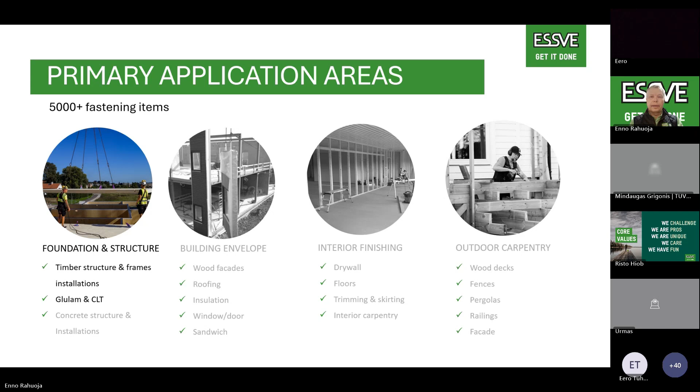Today we're talking about working life, and working life of building materials is the focus. The fastener part of working life will come in June, before summer holidays. But I will raise a question here: if we talk about working life, we know that there is short, medium, normal, and long, where short is 10 and long is 100 years.

I will raise a poll question now where I ask what is the expected working life of fasteners. Feel free to answer, and then you will see how it comes out. We will look at that more closely in June. Then I will take the slide, whether you have already answered or not.

And the feedback is that actually it's 25 years. And the question is, how do we come to that 25 years? If we look at the table of categories of design service life of buildings, that's the picture architects often look at. From an architectural point of view, buildings are normally either medium life, 25 plus years, or long life, which is residential buildings, 50 plus years.

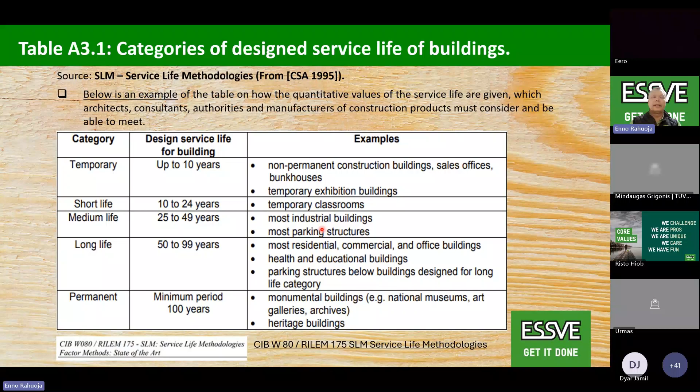But how do we get the facade application to 25 years, for example? That is another supporting picture, coming from the expected service life of works and construction products. So this is the product part, and there is also table 3.3 if you want to go in, with the link below, on design life of construction components.

Why I bring that up as an important discussion point is that normally engineers following this table look at 50 years, and we know that 50 years is the lifetime of the works. I recommend using "normal" in project descriptions. If we write 50, then all applications are automatically 50 years. But if we write normal, then for construction, less easily repairable or replaceable areas are 25 years, and repairable or easily replaceable areas are only 10 years.

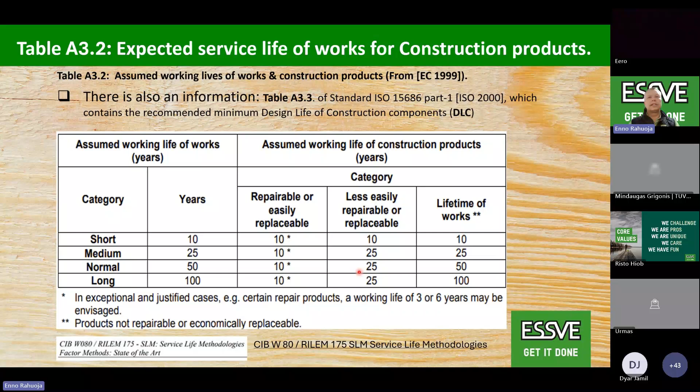And as facades belong to that area, then the working life of a facade will be 25 years, for example. And when we look into the fastener part, also our full system EAD document side in June, then we will see that it will confirm it. To go forward from the fastening point of view, when we apply CE marking for our products, fasteners, then normally we follow the EAD document, we get the ETA, and or we follow the harmonized EN standard. Then it is the same as for the products.

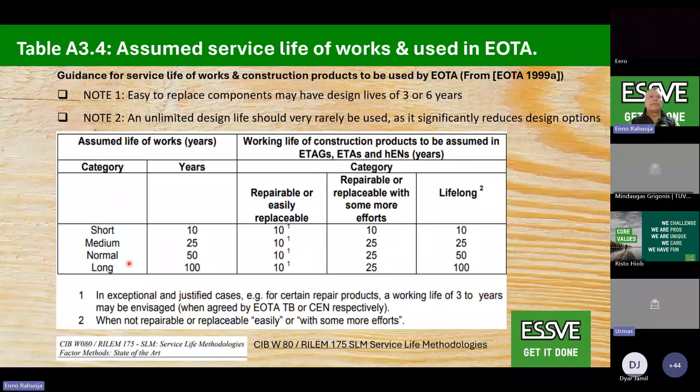Normal means 50 years lifelong as well, but the description of repairable or easily replaceable is similar, 25, 10 years. And that's why when we call a project normal, you are more safe, you make your project more competitive, and we can be more flexible looking at products and the working life with competitive products in that area.

Taking a step forward, if we look at the massive timber area, normally the structural works are always 50 years. That was not the subject we were talking about today on facade content, but structural work is always 50 plus years. And we know that there are also different timber materials in working areas. That could be CLT, or it could be LVL, or it can be glulam, GL.

I have here also another question to raise to you as a poll. I will raise it up. Let's see, coming now. Just a moment. Here we go.

Name correct timber connection working life influencers, because we have different influencers. Here you can have multiple answers. So if you know, feel free to give an answer. But it's a good educating point just to see how we think and what we see as an influencer for timber connection working life. You are free to give more than one answer. But I will go forward with the presentation, and I will switch the screen and go a step forward.

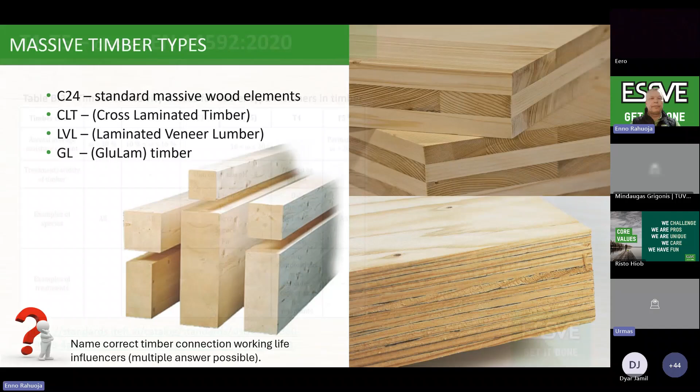Stepping forward, there are also different connections when we talk about brackets. We bring it in, or we do cross fixings, often done with harmonized products or ETA approved products. We go on angle fixings. And here are also different wood materials, also treated, in external environments. And I would like to think about how the influence of the treated timber will go towards the metal applications, fasteners, brackets, and so on.

For that reason, I have set up a table where we raise a question: are you ready to put where steel, aluminum, copper, and stainless steel will be located in the corrosion table? And why I'm talking about it is because copper is a material in impregnated wood, and in impregnated wood, copper makes the wood life longer, but it also strongly influences the fastener working life.

Question here: which group do we locate the next metals in? That is now for you to give us feedback. Is it steel in group 3? Is it aluminum in group 2? Is it copper in group 5? Or is it stainless in group 4? That's up to you to give the feedback. You will see the answer now. I will come to the presentation part, and the question is done.

You have done your poll, and when I bring up the answers, you will see that aluminum is aggressively influenced by carbon steel, but even more strongly by stainless steel and copper. And as copper is the highest level, in the impregnated wood area, to come to the 50 years working life, we should always choose stainless steel fasteners for external environments. If we go for internal applications, then normally we don't need impregnated wood. And for that reason, the neighboring materials are very good to use with each other.

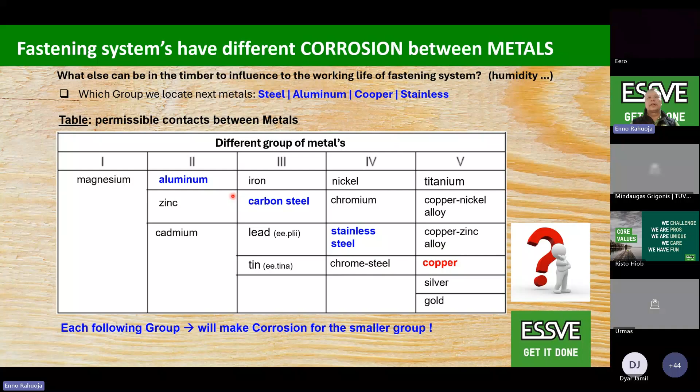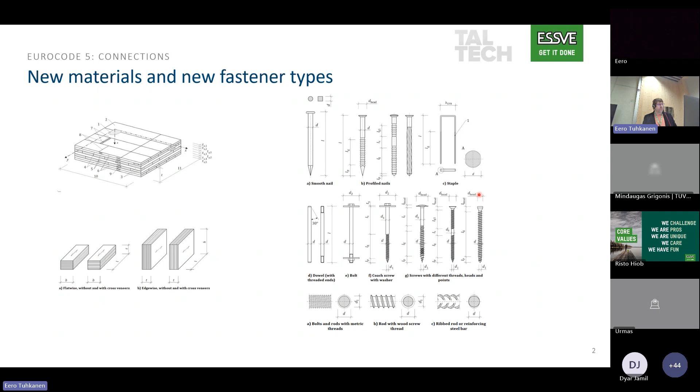Calculation in layered products is quite complicated because we have to consider different angles defined for layered products. For example, there is the angle between the direction of the force acting in the shear plane and the grain direction, so we always have to consider the grain direction. And there is the angle between the fastener axis and the surface of the wide face. So there are different angles, but the most important regarding today's topic is the angle between the fastener axis and the grain direction, which influences the pull-out strength of the fastener.

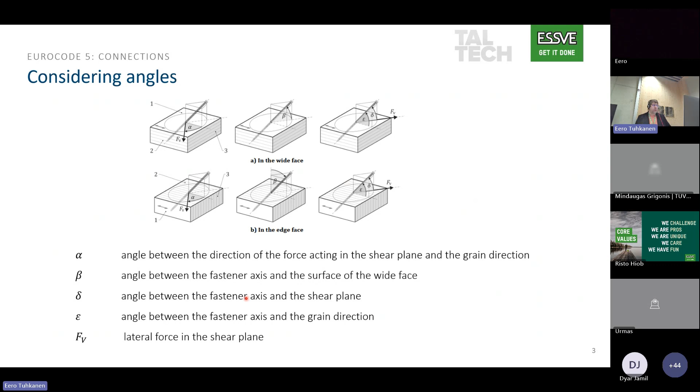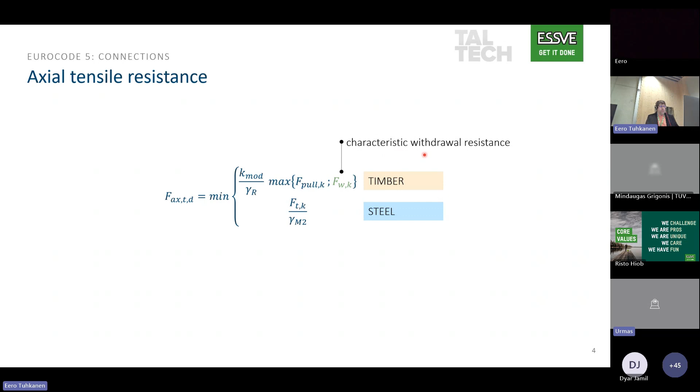The formula in the coming Eurocode for axial tensile resistance considers both the timber part and the steel part. We have to check the steel strength and the timber part: not only pull-out, but also head pull-through from the material. The pull-out, the characteristic withdrawal resistance, includes a specific parameter called the characteristic withdrawal strength.

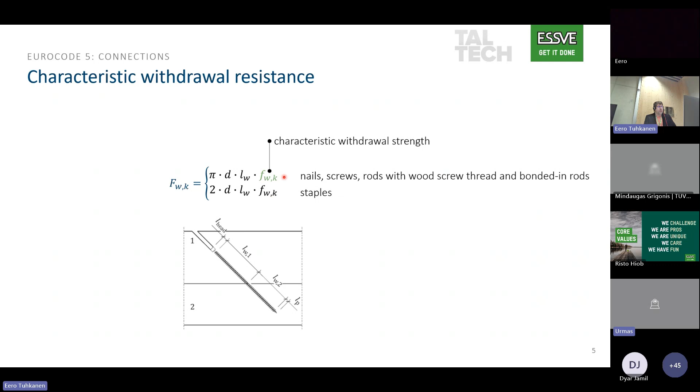This formula is similar to the existing Eurocode. We have to consider the diameter of the fastener, the embedment length, so how long the part in the timber is, and this characteristic withdrawal strength. And this is defined in a new way in the new Eurocode. For staples there is also a formula, but today we are focusing on screws.

The characteristic withdrawal strength has many influences, marked with different factors: k_screw, k_w, k_mat, k_rho. Looking closer, k_screw is the factor for characteristic withdrawal strength. It considers the diameter of the screw, and the reason it is in the standard is that we also have to consider the ETA. I will talk about this k_screw factor more specifically later in June.

The parameter you maybe know better is the one for the angle between the fastener axis and the grain direction, which I mentioned earlier. Sometimes producers give results where this angle is already considered, but the new Eurocode has formulas you can use to consider the angle between the grain direction and the fastener axis. And of course the reference density exponent: when calculating withdrawal capacity we have to consider the timber class, and different timber classes have different characteristic density, and this factor considers that.

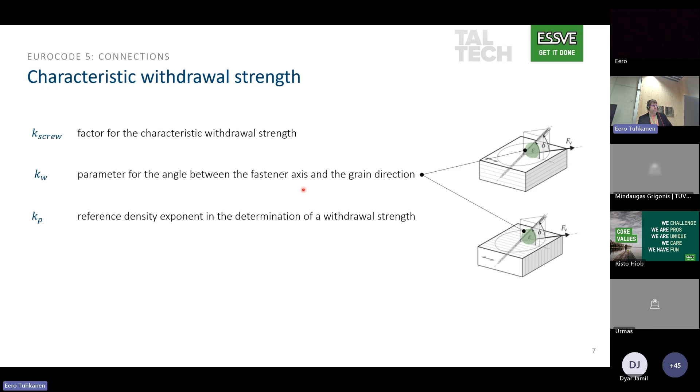But today we had this topic which I bolded, which was characteristic withdrawal strength in laminated timber, and this is something new we don't have in the current Eurocode: the factor k_mat. The k_mat is considering the number of laminations, and it's because today the screws can be very long. We can use the screws for reinforcement, and also we have many layered products, and if we make the connection in such a way that we go through many layers, this will increase the characteristic withdrawal strength, and this is covered with this factor k_mat, and we can increase the withdrawal strength up to 15%.

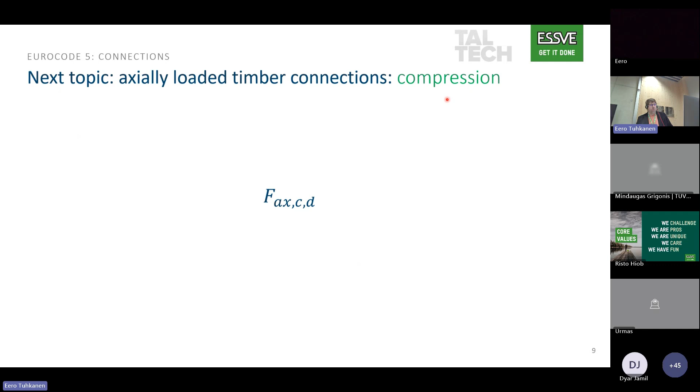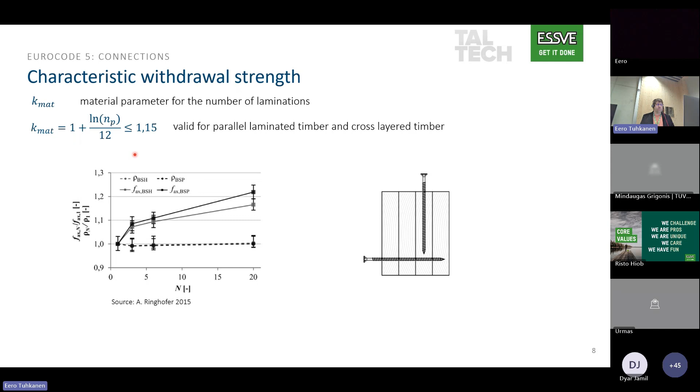This is mainly based on the work made by Andreas Ringhofer from Graz Technical University, and this doctoral thesis shows that if we go through more than one layer, then we can have higher withdrawal strength. So this is something you can consider. Next time I am covering axially loaded timber connections in compression, and in this presentation I also show in which situation you can benefit from this k_mat factor, where it does have an influence. So this is all from my side.

Thank you, Eero. As a structural engineer, I think it's not too easy to have control over all the connections which you have in a building. Maybe you have more than 50 or 100 connections in different directions. Maybe we will prepare one summary webinar where we go through the questions, the general question about how a structural engineer can guarantee that when he calculated one or two connections, he has control over all. Maybe we will have it as the last webinar before the summer.

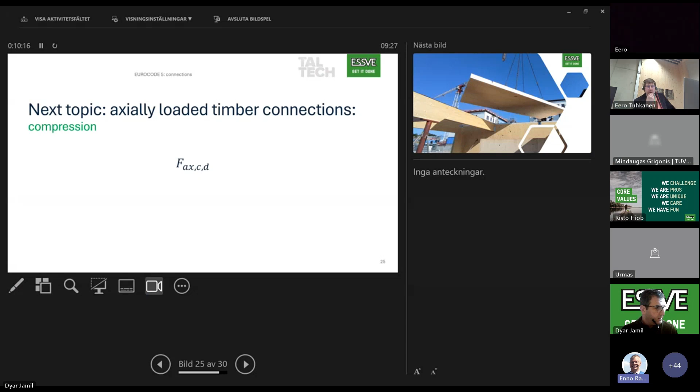Please, Enno, can you pull up the next questions, and I will share my desktop again. Yes, I will do that. You mean the poll feedback questions? I can raise it up, but at the same time, everybody, you are welcome to put your questions in the chat field. In the chat field, I have raised one question for Eero, but that is just a feedback question before the end. Eero, have you found the question? Yes, I have found it.

You asked about the secure connection. So yes, we had this a couple of webinars ago. I talked about safety in the connection, and a safe connection means that it has a certain amount of ductility, and in the pull-out we can also consider steel as the deciding part of the failure, and if the steel is deciding, then it also has a certain amount of ductility. So yes, we can design the screws in a very ductile way to ensure secure connections.